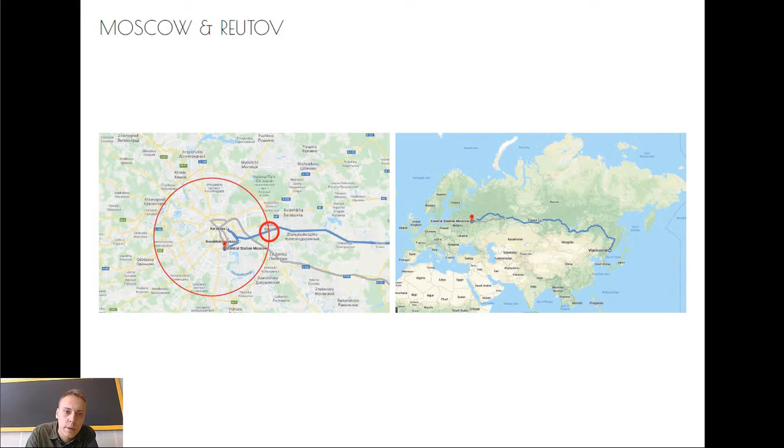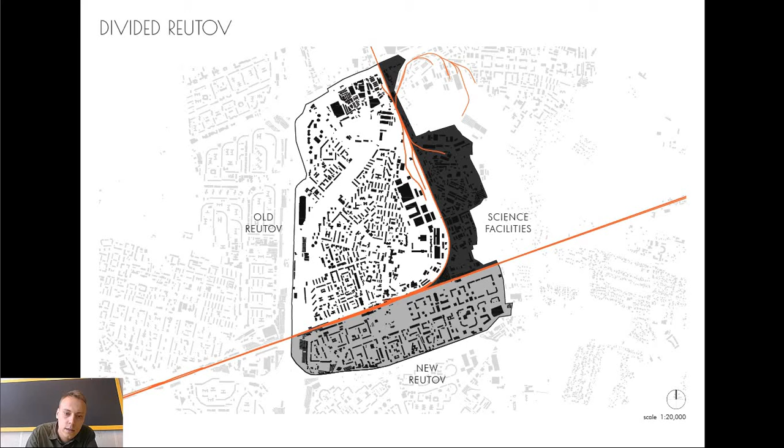Reutov is a small town on the eastern side of Moscow, and it also acts as a connection hub between Moscow and the rest of the country via the Trans-Siberian railway system that passes through it. This railway divides the city into three distinct parts: the old part, the scientific facilities related to space programs, and the new living quarter in the south.

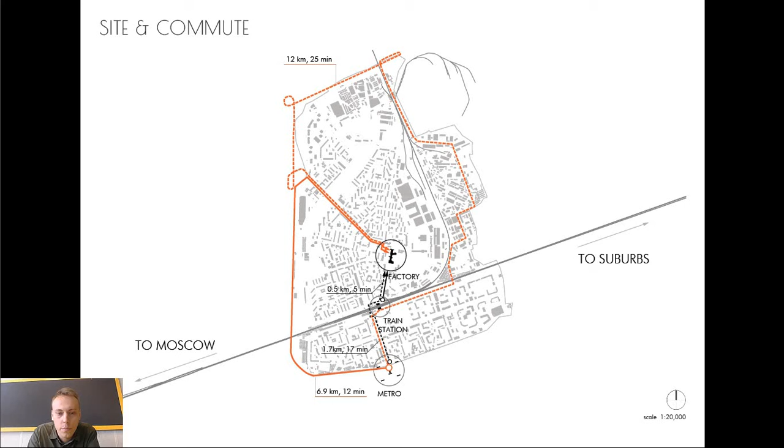All the districts are connected rather poorly, and in order to get from the metro connection in the south to the factory that is our site location, it actually takes around 12 minutes by car, and walking distance is as long as 17 minutes. There is no bridge, only a mere underground connection. This creates the problem and the solution for the project.

The urban concept for the project is to create a cultural recreational axis. Someone arriving from the metro would go all the way to the factory and bump into a cultural object every

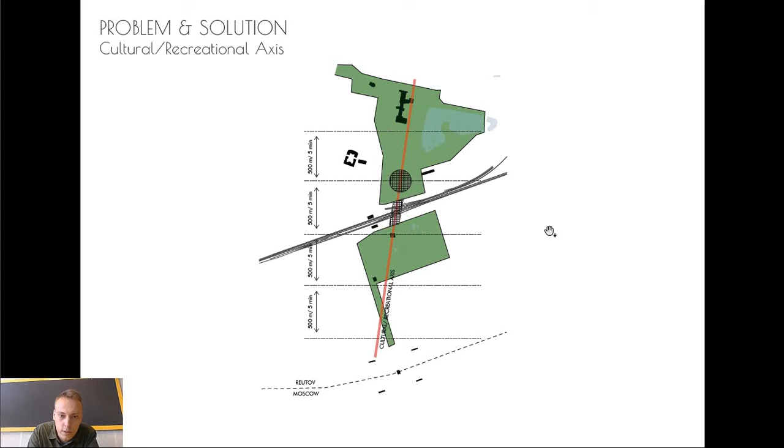5 minutes, but the only problem is that the middle of this recreational area is divided by the railway. So we solve it by introducing a building that acts as a bridge and connects the two separated main areas of the city. In this way, we come across two urban conditions.

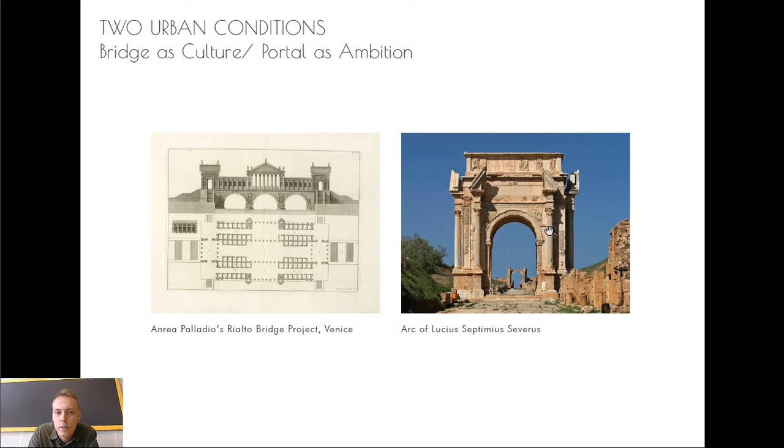One is a bridge, and as Palladio has shown us, a bridge can be more than a bridge. It can have a program of its own, and at the same time, since it's a hub or a gate to Moscow, it also acts as an arc or a portal — a place of ambition or a vision.

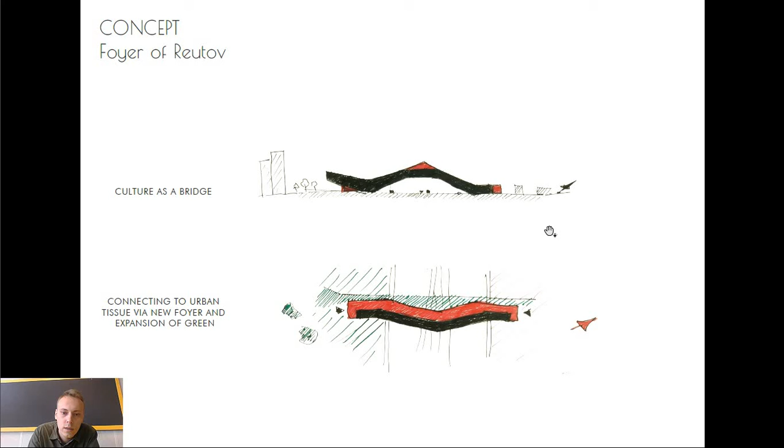So here comes the concept that culture, the cultural center, can act as a bridge. The building is conceived as a bridge that has an additional program of a cultural center, while the transition itself becomes a new center of the city — a portal, a place of ambition where the city represents itself and its ambitions.

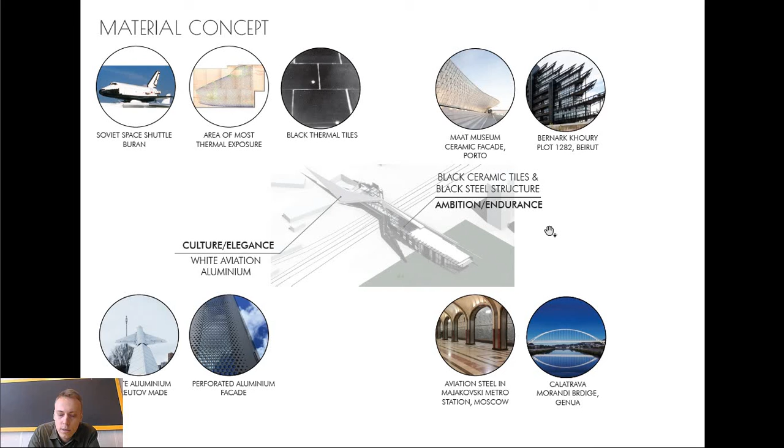Here comes the material concept of the building. The cultural part is clad inside and outside in light materials, more reminding of a flight or a plane, while the transition part uses dark materials, just like in a Soviet space shuttle. The black tiles were used for the parts exposed to the most heat.

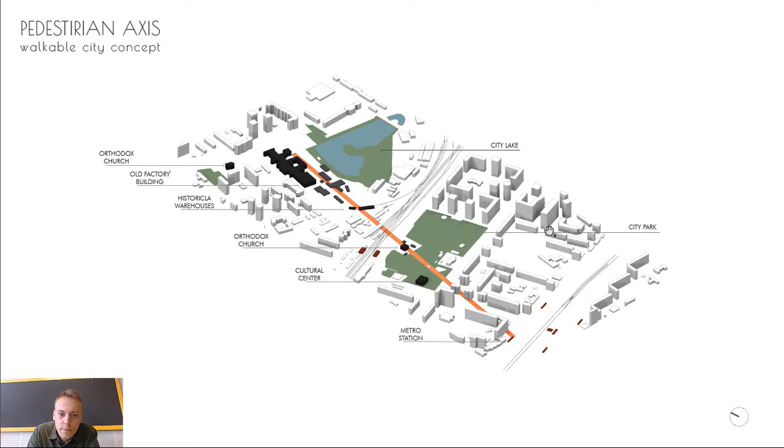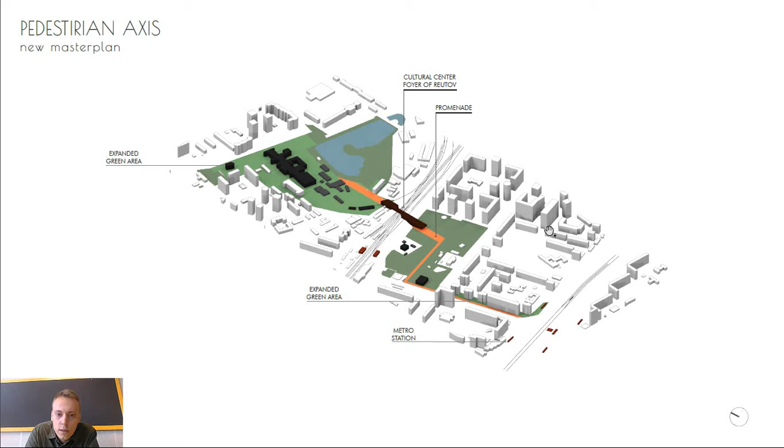So the initial concept transferred to 3D turns into a master plan where a massive urban promenade is introduced, connecting the metro to the cultural and green areas, and our building serves as the main bridge.

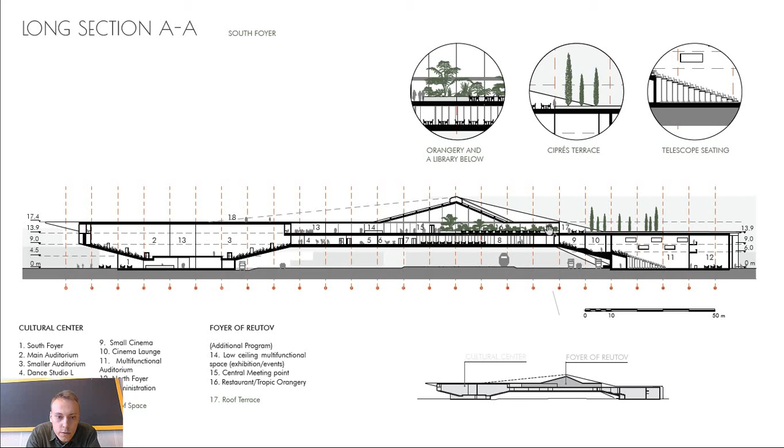It takes you over the railways, and inside it offers you a variety of cultural programs — there are concert halls, various dancing studios, and a library.

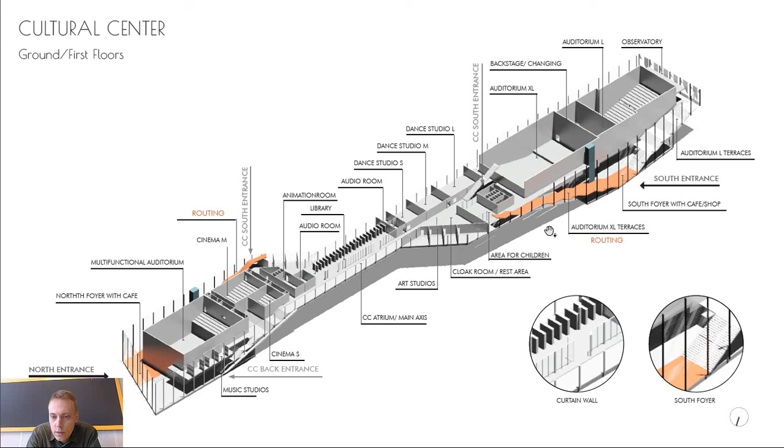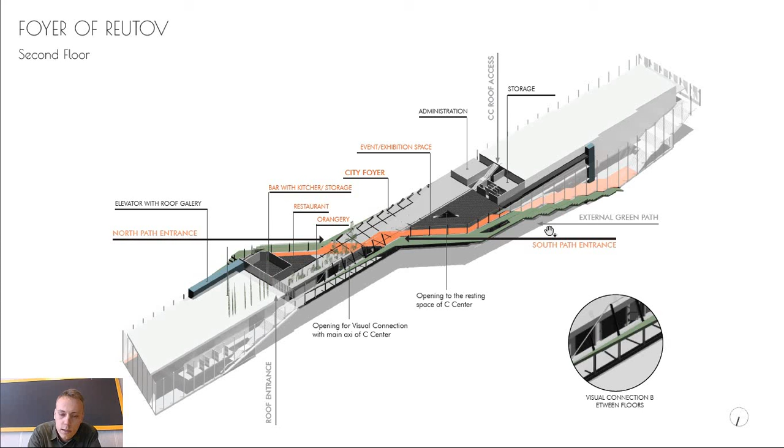These are like small hidden spaces, while if you follow the main path, graphically shown as red, you end up at the top of the building, which is the main foyer space — the representational space where people meet. It also acts as a transition space, reminding a bit of an airport or a place of departure.

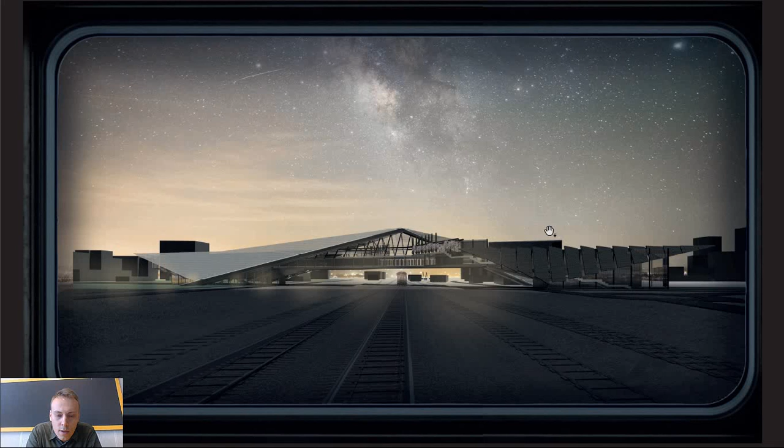So that's the presentation and the building.